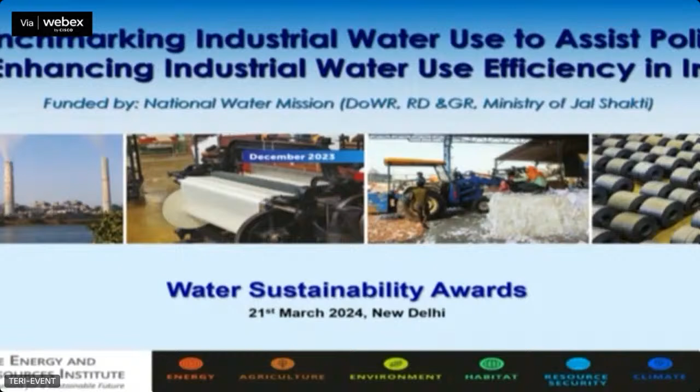Well, as I mentioned, we wanted to start with the discussion on water use efficiency. As my colleague has introduced, we have an eminent panelist, a set of speakers who are experienced in their sectors a huge lot. Dr. Sarkar has been in the water sector for 30, 40 years. He's been Secretary, Ministry of Water Resources as well earlier, had been guiding us.

Mr. Manish Gandhi, really like to thank him for agreeing to be here on very short notice. He has a huge amount of experience on industrial and technological perspectives and innovations in the treatment of water, and therefore the possibilities on usage and improving the efficiency and wastewater recycle reuse.

Mr. Kakar has been with NTPC and has vast experience on water use and some of the innovations being taken up in NTPC's thermal power plants, which he might want to share. And of course, Mr. Dilip, who will bring in perspectives from international experiences and the kinds of experiences in water use and efficiency from the UNDP perspective.

If I may, I just thought we'll start with a discussion on use efficiency. Again, as I mentioned, there are different sectors, and one can go on discussing the issues in each of them. But something we have recently completed, we wanted to have a discussion on - benchmarking water use efficiency in the industry sector in India. We had taken up 4 sectors: thermal power plants, pulp and paper, iron and steel, and textile.

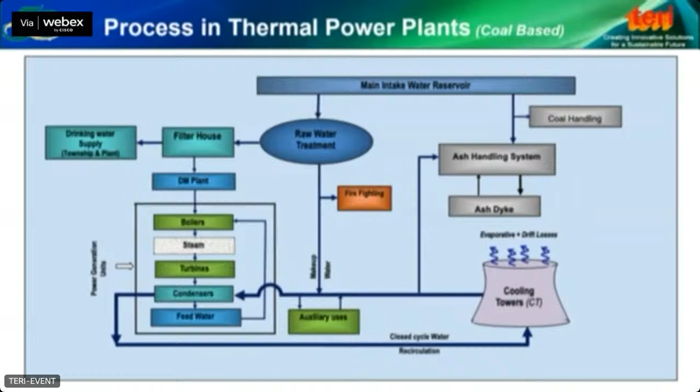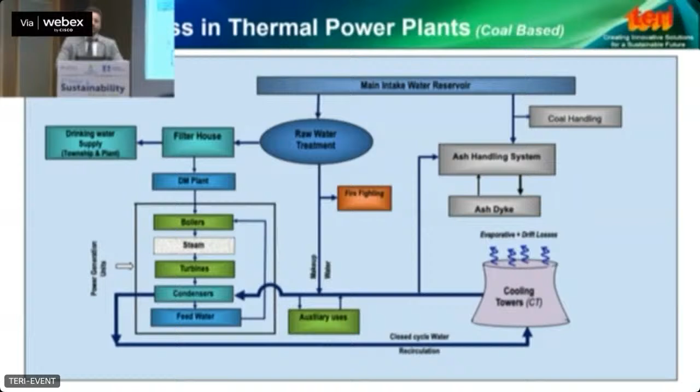I do want to give you a flavor of it. There's a huge lot of discussion details, but I don't want to go into that - rather the key messages, because I want to hold more time for the panel discussion. These 4 sectors, we went through their different capacities and different kinds and types of raw material based production. We audited them on ground, looked into available secondary data across the sectors, and based on these audits, there's a huge range of opportunities that we identified, which is what I want to share with you.

For example, in case of thermal power plants, those of you aware of the process know you use a huge amount of water for cooling of the cooling towers, as well as ash handling, which is used in a huge way in the power generation process. The range of opportunities included, for example, recirculation of water from ash dykes back into the system - reuse and recirculation of ash handling water - as well as increasing the cycle of concentration, which is basically reusing the water used for cooling purposes more times within a closed loop manner.

But there are other opportunities as well. For example, the amount of wastewater generated and discharged out of the system without reuse could very well be reused. I'm just enumerating some of them - some of the NTPCs and power sectors have already taken this up. But this is more to be disseminated to the wider, larger group so that everybody is able to pick it up. So the best practices and kinds of interventions make a huge relevance here.

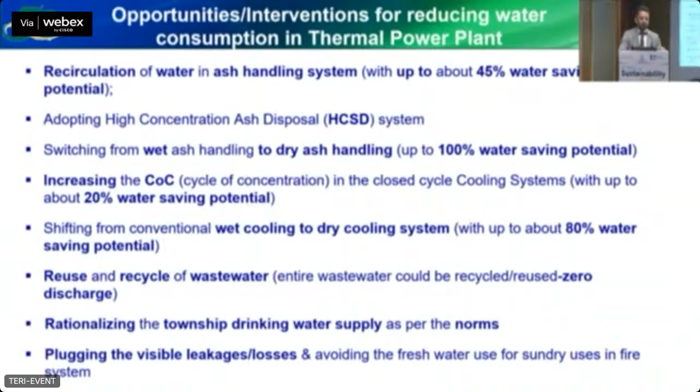There are aspects related to rationalizing water use in the colonies of these industries. Wholly, there's a huge amount of possibility of saving water. If you look into best practices, in the thermal power sector there's dry bottom ash handling, use of hydrobins, concentrated slurry disposal systems, dry cooling - though this is difficult because there has to be a trade-off between power generation and water conservation, but it's still a possibility. And then, of course, other interventions.

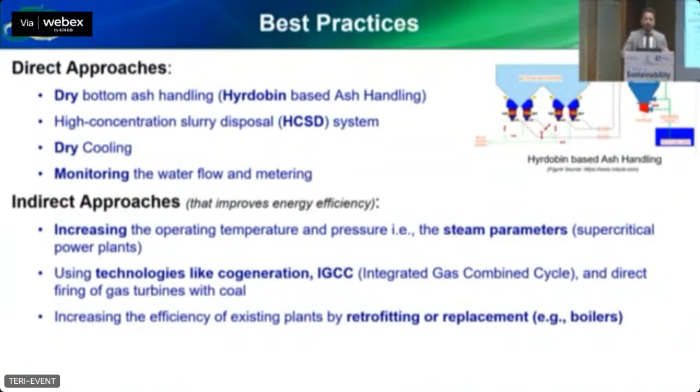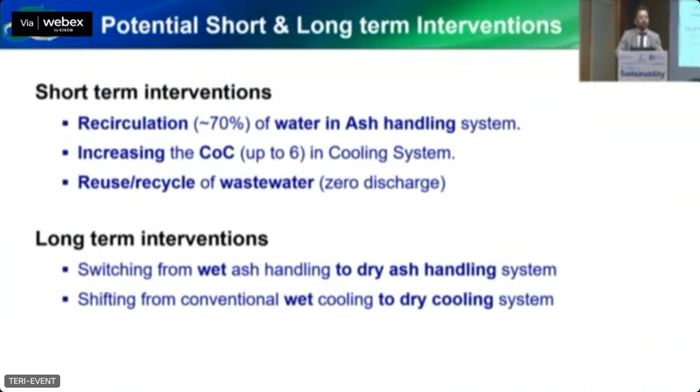There are other indirect approaches, for example increasing the operating temperature and pressure, the steam parameters - basically supercritical power plants have it - and cogeneration processes. All of these are details, but what I wanted to highlight is that in the short term and long term, we identified some very low-hanging fruits - recirculation of ash water and increasing the cycle of concentration, which is more about recycling the cooling system water and reuse of wastewater. This alone can save a huge lot of water because almost 70 to 80% of water in the thermal power generation process is between the cooling system and the ash handling system. Then, of course, the long term involves dry ash handling and dry cooling. These are the kind of benchmarks based on identified interventions and potential opportunities that can be implemented on ground, identified based on different capacities and different kinds of options.

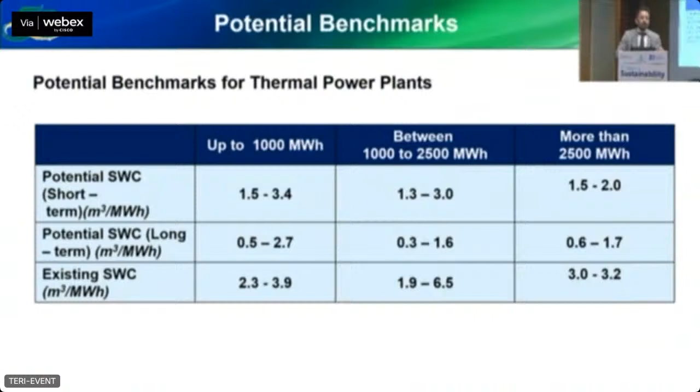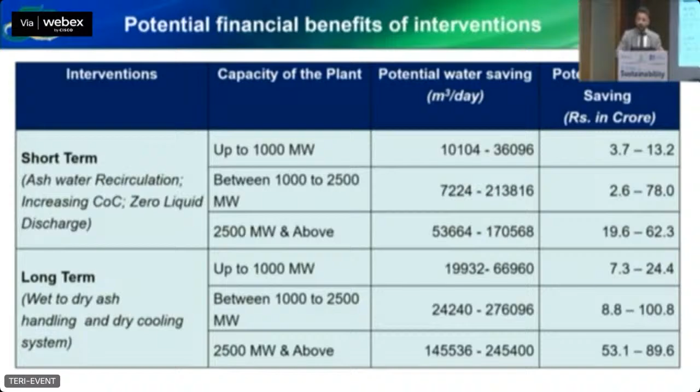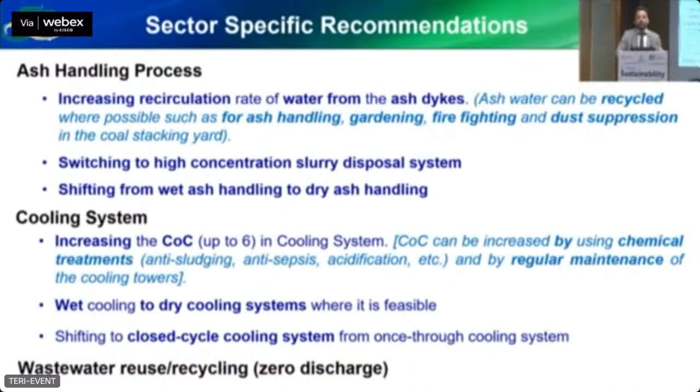I also want to highlight that many of these interventions are a financially attractive proposition as well. Besides saving a huge amount of water, there's also a fairly attractive financial saving. So it makes a lot of sense to take up these specific interventions, which are possibly the low-hanging fruits that can be adopted in this sector.

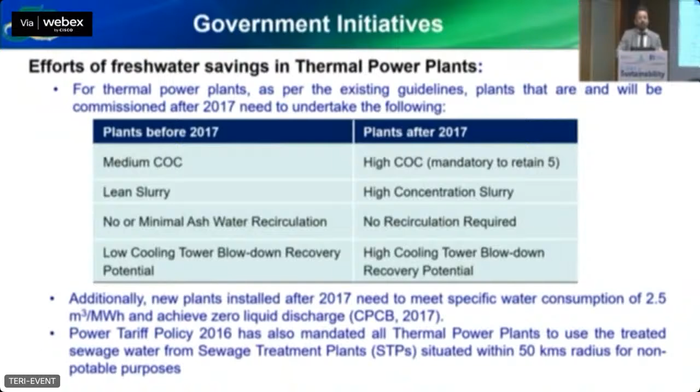There are initiatives by the government. For example, under the power tariff policy, power plants have been mandated to use treated sewage from within a 50-kilometer radius, and many other interventions have been suggested. I think that has helped guide industries toward the benchmark process.

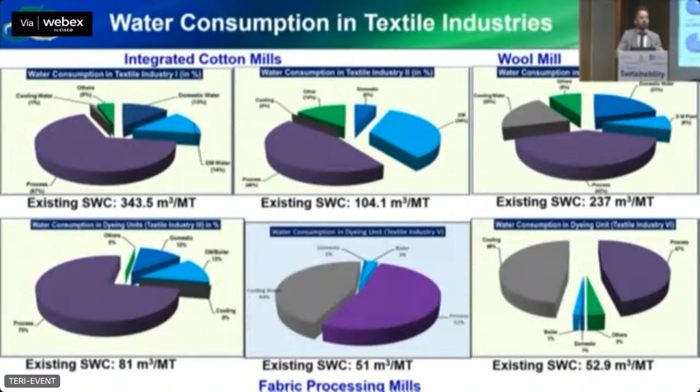Likewise in textile, I'm not going to go into details of the process, but we looked into water use in textile processes. In the entire process of dyeing, right from yarn to fabric to the dyeing processes, there's a huge amount of water consumption.

The summary of the range of interventions you see here is how we can recirculate and reuse water within the processes as they're taking place—for example, in dyeing, in washing processes. Counter current is one example.

Not going into technical details, but the point is there's a huge opportunity for reusing water within the processes while it's being used, as well as after the process—treating and recirculating it within the system for reuse in various processes.

There are examples within textile, for example a highly efficient CIM machine system which optimizes water use. It's being adopted by some industries but can be widely adopted in the sector, and therefore that critical mass impact can be achieved here as well.

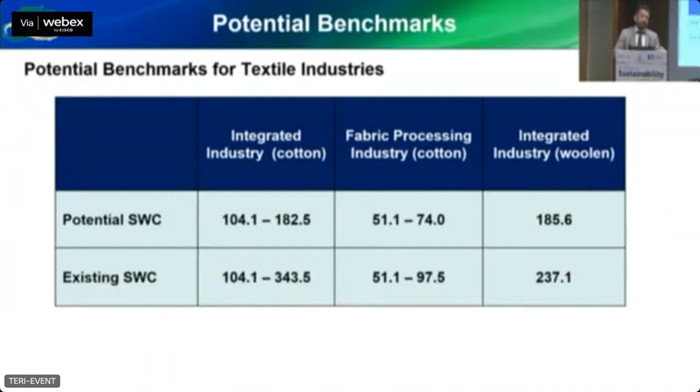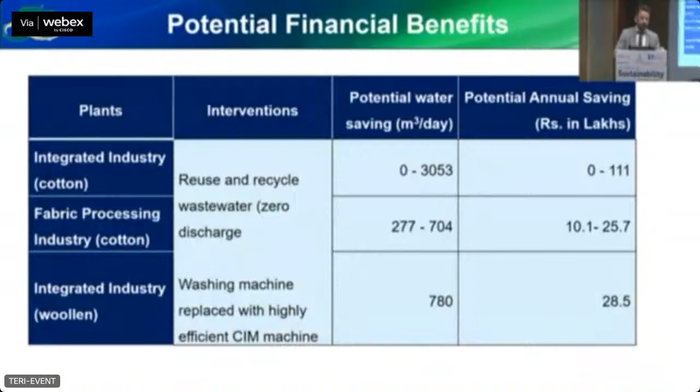Details of the kind of intervention—these are the benchmarks we derived from our study, which can be achieved. By the way, this sector and the pulp and paper sector have moved a long way. Just to give an example, this is the amount of financial saving as well as the water saving.

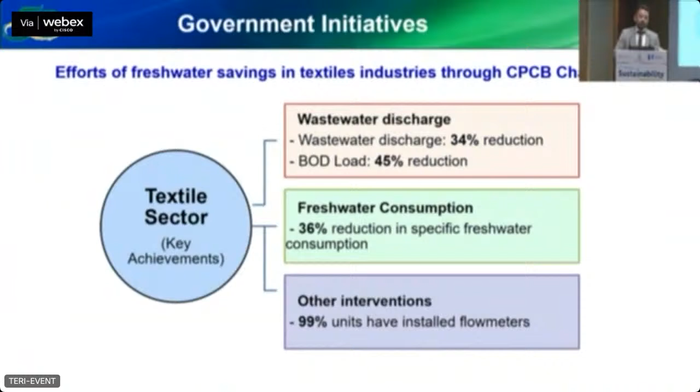Sector-specific recommendations—not going into too much detail—but government initiatives have been significant. CPCB has taken a good lot of initiative in interacting with both the textile and pulp and paper industries, sharing and guiding implementation of best practices in these sectors, which has had a fair amount of impact.

Pulp and paper: there was a time when the pulping process used to take a huge amount of water, largely 80% of total consumption during that period. But over some decades now, the pulping process has improved a great deal, and now water consumption is much less, almost 20-30%, because more reused material is used where pulping is not required.

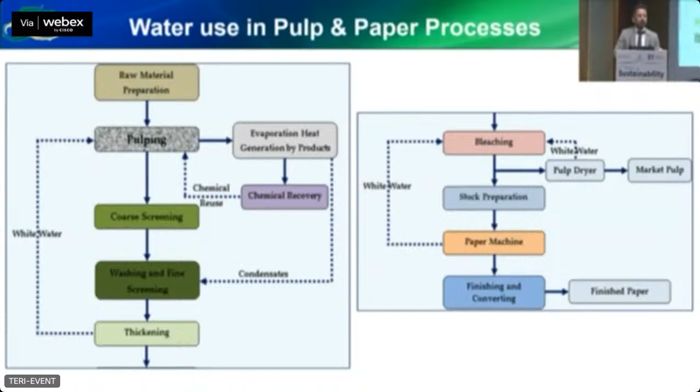As well, there's the removal of color and lignin. So it's the same process, but as you can see, different kinds of process consumption, water consumption, and opportunities.

In this sector, for example in the pulping process: dry debarking, improving pulp washing technology, de-inking process, flotation de-inking process, and introduction of new technologies like dry pulp for cure-form paper, which is almost near waterless, and similar technologies.

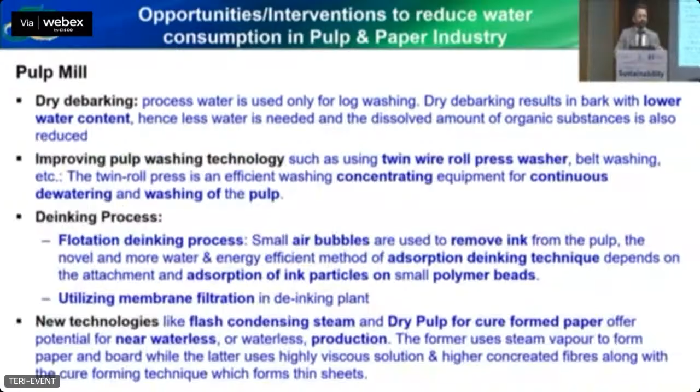Likewise in paper making, there's a saveall clarification system—essentially you collect the water after the process and reuse it within the system. There's also a disc filtration system where you use nozzles to filter the water and get 2-3 kinds of water of different purities.

Then you use the water according to its purity. The purest form is reused into the system directly. The less pure water is further treated and then again reused into the system.

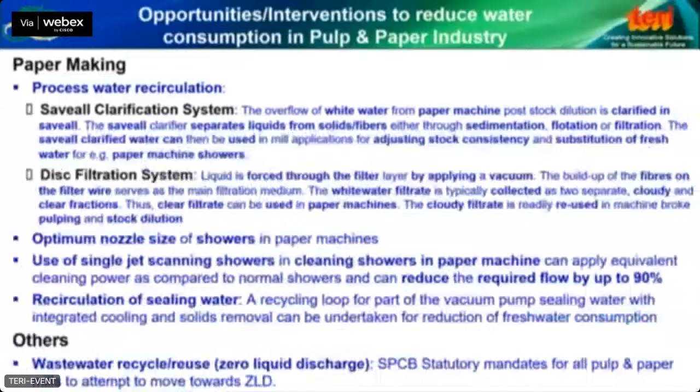All of these are interventions which we found very useful, with huge water saving potential. Applying these brings a huge amount of water saving and therefore the potential for reduction in specific water consumption. Again, you can see huge water saving as well as financial saving.

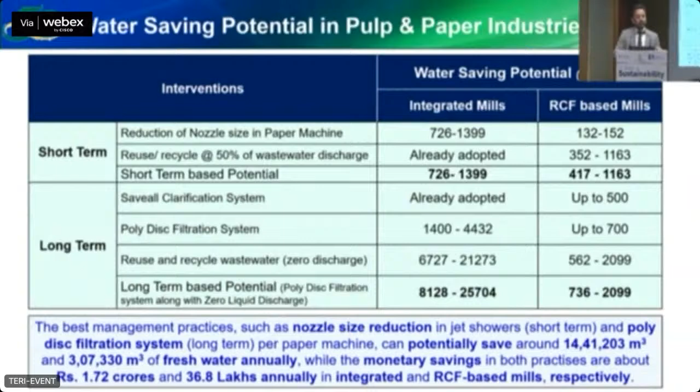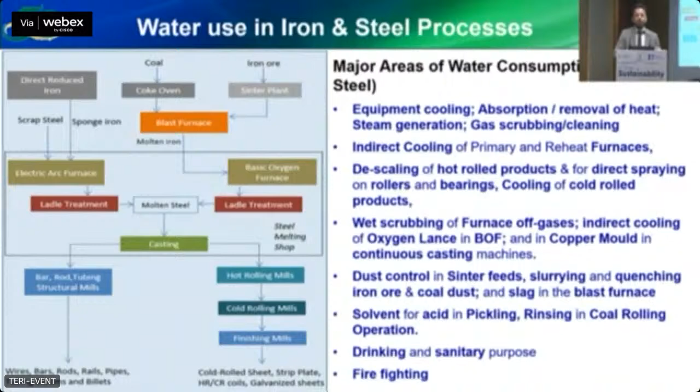Iron and steel, likewise, uses processes like electric arc and blast furnace processes. A huge amount of water is used in this particular industry.

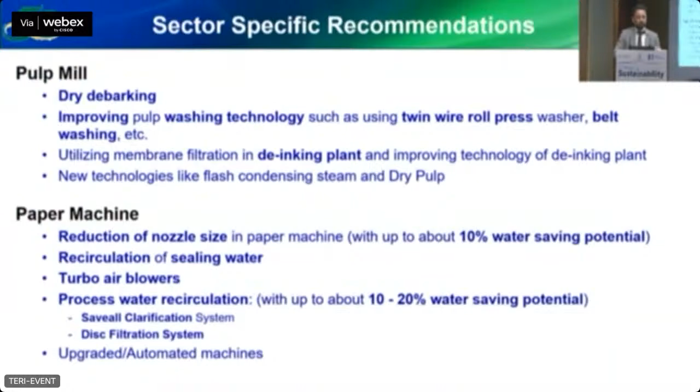Vizag is doing that, and many other industries are also doing that already. So there are some best examples which exist in the sector already. These are some of those ranges of interventions. A huge amount of efficient water use can be achieved, and therefore we identified benchmarks to be fairly lower than what exists now.

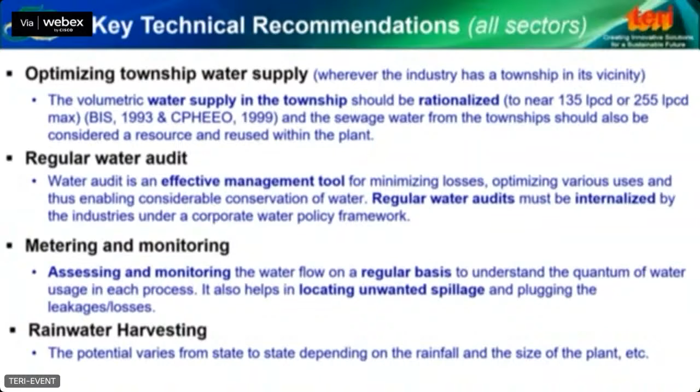All in all, we looked into the kinds of technical interventions within each sector that can be adopted. In general, this includes optimizing township water supply, regular water audits, metering, monitoring, rainwater harvesting, as well as updating technologies, automation, and recycling and reusing treated wastewater against benchmarks. All of these are required not only from the industrial perspective but also from the policy perspective. What we have also recommended in our policy brief is about incentive mechanisms, and these benchmarks can be adopted and further taken to other industrial sectors as well.

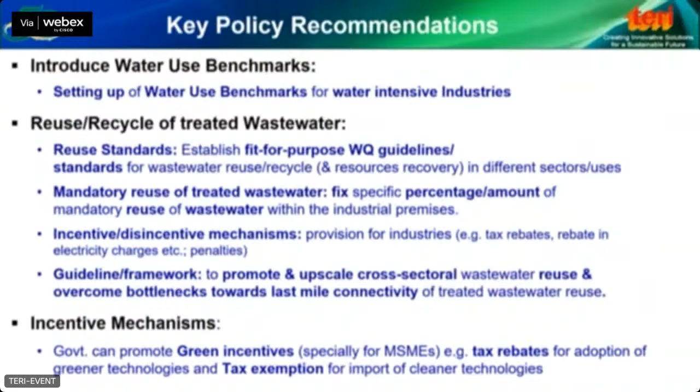The perspective of recycling and reuse of water, and in that sense also the rational pricing of water - not only water but also wastewater, because that too is a resource - is something very much required from the policy impetus perspective, besides the strengthening of institutional and monitoring capacity.

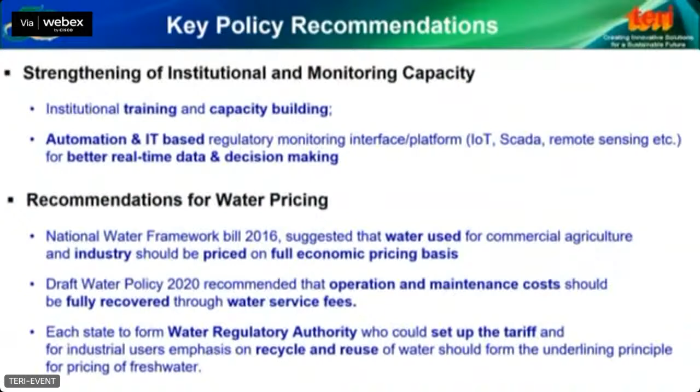I'll stop here. These were some of the key highlights of the detailed study that happened for almost 4 to 5 years, practically, if I exclude the COVID time. We are very happy to have had the support of the industries in this process, as well as the Ministry of Water Resources, National Water Mission in particular. We would like to thank them, as they were key to initiating this particular study.

Now, I wanted to give a flavor of the kinds of opportunities if one would want to go into detail in various sectors. This is something I would want to initiate through a discussion with our esteemed panel - this discussion is not necessarily only focusing on industry. This is some of the work we have done in the recent past. We'll also be launching, or in a way unveiling, a policy brief in a short while.

May I then open the panel discussion and invite Dr. Sarkar to share his thoughts and experiences. He has a vast amount of experience interacting with industries and stakeholders at both ends, within the government and outside the government. He has also been guiding us, and Dr. Sarkar, we would like to hear from you - besides what you want to speak about, also how you see the policy, for example, can be further developed so that we have that critical mass impact, as I keep saying. How do you think, and what do you think are the critical things needed to promote that? Please come over and share your thoughts on this question, if you may.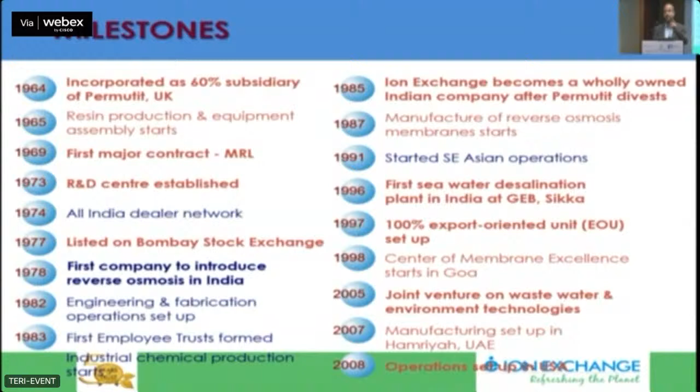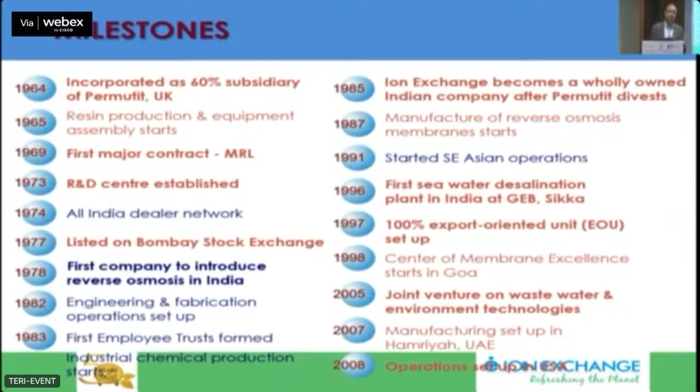85 to 90% of technologies in India are by Ion Exchange. Everything - today, when we are talking about recycling, who made it feasible, right? So I'm going to touch these topics.

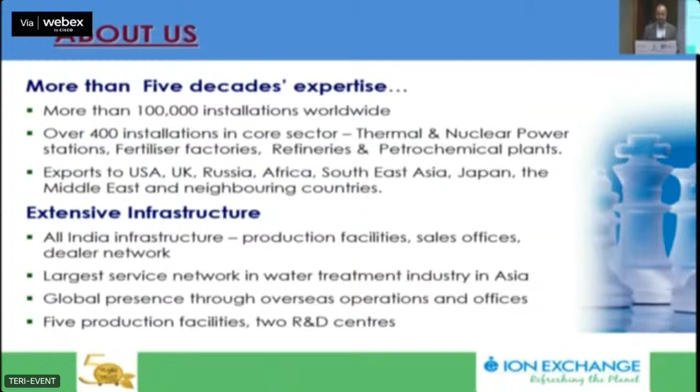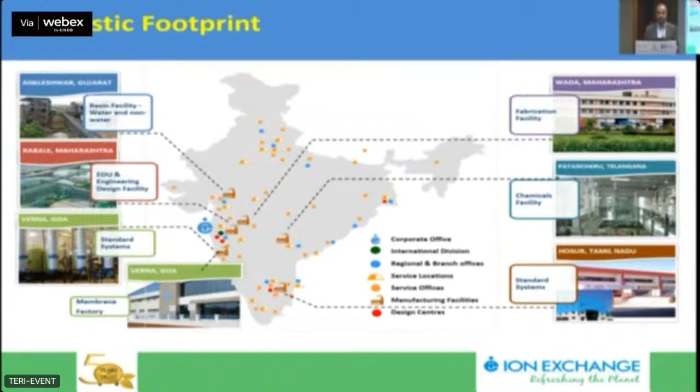We are one of Asia's biggest water and wastewater companies. We have more than 1 lakh installations, almost 400 large power stations, fertilizers, refineries, petrochemicals, steels, plants for mining. Apart from that, medium, light and all, with more than 1 lakh installations. We have 7 manufacturing units across India, more than 2,000 people working in the company with another 3,000 people on our own payroll.

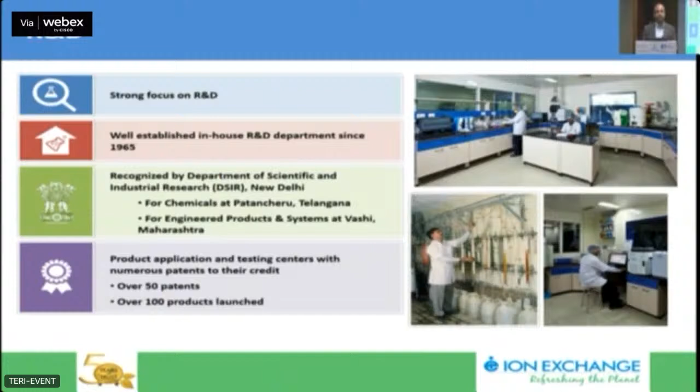We have two big R&D centers in the country - actually big R&D centers - because this company is surviving because of technology, because we keep coming up with new technologies, new solutions. Why? For the sake of industries, for the sake of human mankind, and for the sake of maximum efficiency in what we can deliver to our society and the industries. So the topic is again, how we can conserve water.

Before I show one or two more slides on recycling, use and other things, I want to share one very important piece of information from a recent economic survey by the government - this study mentioned that water crisis is brewing below the ground and up in the sky.

So India is getting affected from both - depleting water below the ground and by rain, which is again a matter of consideration. There are 5 different integrated aspects which are a result of the water shortage. The first and foremost is that the rate of groundwater depletion in India is among the highest in the world.

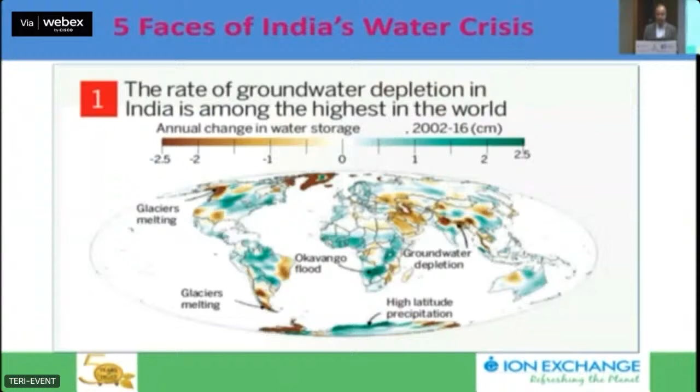Now this is a very, very serious concern. This depletion is something that, in spite of the fact we know this - these are studies by the government - it's still rampant. There are no controls on it, even in cities like Delhi, which is the capital and heart of India.

As groundwater extraction increases, the groundwater table is a cause of concern because it's going down day by day. I don't know whether you know how much is the TDS in the groundwater in the Connaught Place area - one of the most beautiful places in India. It's fluctuating between 8,000 and 10,000, and that too, one has to go 400-500 feet deep to reach it. So this is a serious issue.

Nevertheless, it started with Bangalore - how today employees have been asked to work from home. The statement isn't finished there - go back to your home. Guys from other regions are also asked to go home and come back to your parents' house, operate from there.

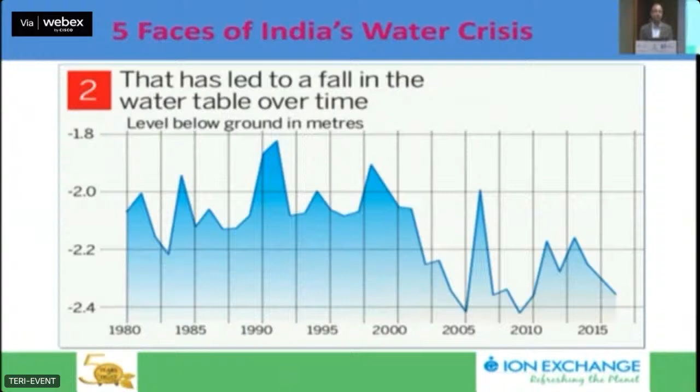This is like a global map - it's an IT hub in the world, and see where we landed. This is a very serious issue. This is the impact of water depletion, not only in the urban sector but also in villages, because everywhere surface water supplies are not available. So withdrawing groundwater from rural and urban areas is causing an equal challenge.

Third is due to rising average temperature. I hope you know we talk about environmental sustainability, and this is a hot topic throughout the world, discussed at all top forums. This is also a cause of concern - there's a temperature rise and a decline in rainfall, and there's no clear-cut time period for monsoon anymore.

Earlier, if you talk about the north, monsoon used to start from 15 July and go up to 31st of August - about 1.5 months. That duration is reducing day by day. Rains used to be on a daily basis, but now it's very scattered - it may rain very heavily for 1 hour, after that it won't rain.

Those irregular, completely scattered patterns have also led to less water going into the ground, resulting again in depletion that is not being covered up.

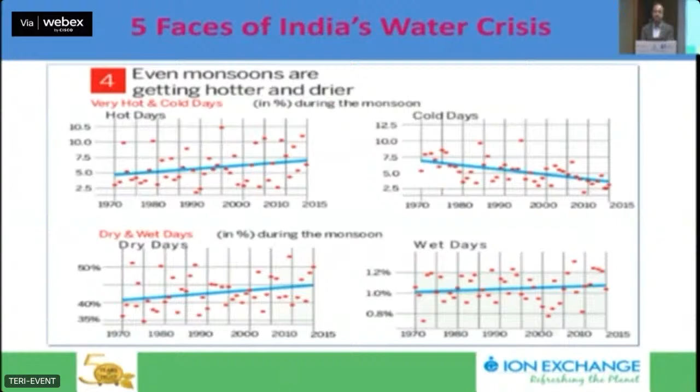So even monsoons are getting hotter and drier. This is a very serious issue. There are a lot of graphs shown, cold days, wet days, hot days and all, but I don't have time to go through each and every slide. These are facts that have come out from government studies which I wanted to highlight. The north and central part of India is very much affected. I'm also handling the East region, and by God's grace, they have enough water. But central, north, and south together, almost three-fourths of India is really going through a water crisis.

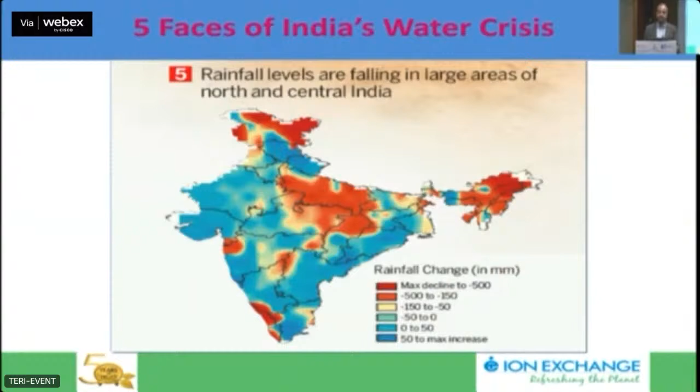What we need to do, look, I come from the industrial perspective. We work for all industries, there are more than 21 kinds of industrial segments. For each and every industry, we now focus on the first water treatment plant we install, how efficient those plants are, and make sure recovery is maximum. Suppose I put in an RO plant, reverse osmosis plant. We make sure whether it's a small or big industry, the RO recovery should be as high as 90%, and wastage should be as low as possible. The water that gets wasted should also go to the ETP plant so we can recycle it. So we always focus on mass balancing.

First and most important thing is the water audit. As Dr. Anshuman has also highlighted, water audit is very key, because if you don't know your total water consumption, how are you going to conserve it?

When we talk of water audit, when we talk of recycling, why do we talk about it? The objective is only water conservation. But I personally feel it's not only water conservation. When we generate effluent and we recycle it, that's a big and major advantage for water conservation. But the second major benefit, which I feel is more important than the first, is that we avoid adulteration of our good water resources which are kept for our families.

We are sitting here, but our family is drinking water, we are drinking water daily. Now all those water resources supplying drinking water at our offices, our residences, all places across India, should be conserved, there should not be any adulteration. But there is adulteration, because there are industries not focusing on these kinds of treatment programs, and because of that everybody is suffering. The number of hospitals is increasing day by day, and all hospitals are full. So this is an indirect impact on the health and lifespan of people. This is indeed a very big crisis.

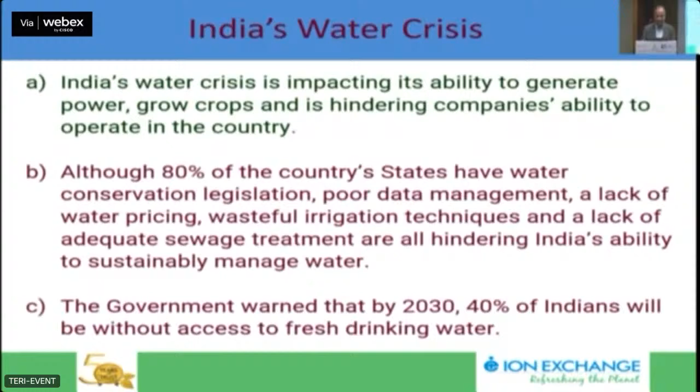So the fresh water which you're taking, you are authorized to discharge only if your discharged water quality is better than the fresh water. So strict rules and regulations exist over there, and that's how things are very sustainable. But these kind of fundamentals don't exist in India. Anyway, this is a very important thing.

So the benefits of recycling are tremendous. This is an important topic for today and tomorrow, which is World Water Day - Water for Peace. Because if it cannot be peace, then definitely it's a matter of conflict between communities, states, and countries. It's going to take a serious turn, which we've been watching for many decades.

So recycling - when we first introduced recycling way back in 1993, IFFCO Phulpur, near Allahabad, became the first plant in India to go for water recycling. That was in 1993, 40 years back.

So it hasn't just started now - it started 40 years back. But sometimes most companies take a lot of time to invest in this segment because they feel it's a waste of money, since water in North India is essentially free. But in South or West India, fresh water is very costly to industries - you'll be surprised. The cost of water in South and West - first of all, it's not even available. Whatever is available costs between 70 to 80, 85 rupees per meter cube.

So there, the justification for recycling becomes very easy. But North India is stubborn. If you increase the tariff by even a few percent, industry starts crying. The same industries in West and South have no issue, but here industries have a lot of issues, because the cost of pumping is hardly 1.5 or 2 rupees - the water is so dirt cheap and available. So this is a serious issue.

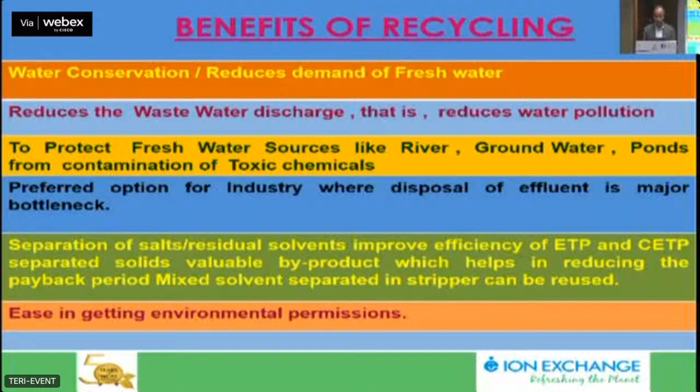So we need to reduce wastewater discharge, remove pressure from fresh water sources like rivers, and protect all these precious sources - also getting environmental clearances must happen. All sources of water like surface water or groundwater should be banned now for industries - no water available for you. So either use sewage water, which is now available everywhere since a lot of STP plants have come up, or use rainwater, or if your industry is in a coastal area, use sea water, or any effluent coming from your plant. This is very important.

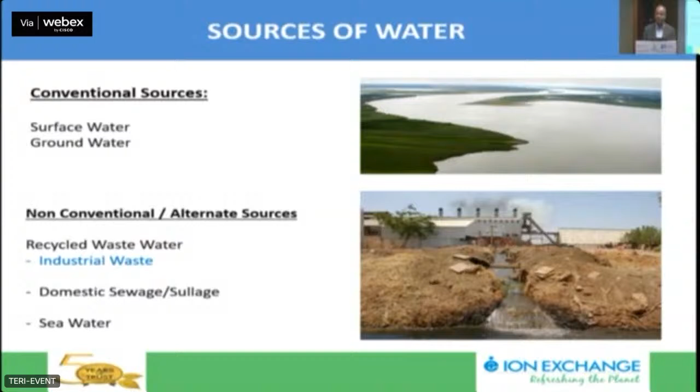In fact, all greenfield projects don't consider these kinds of things anymore - these are obsolete, absolute. So the modern integrated system requires everything to be recycled so that 90 to 92% of the water comes back and gets reused for high-end applications - except for drinking.

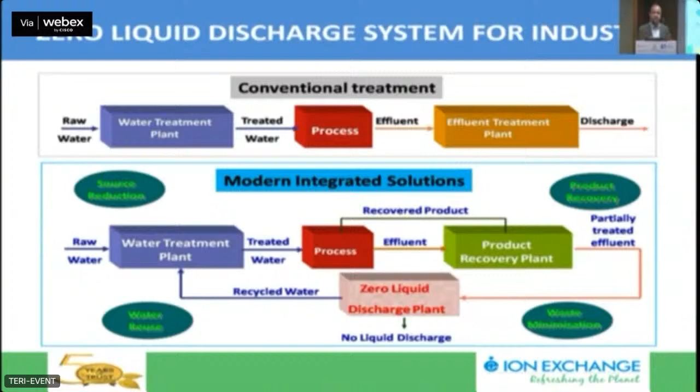Yes, except in two industries - pharma, and food and beverages - where ETP recycled water, even though its quality is as good as fresh water, shouldn't be allowed in direct contact with the product. In the rest of the industries, it can come into direct contact with the product also. So that's about the need of the hour.

In the last 2 minutes, I'll share how we made things feasible - and this isn't theoretical. I visited the Central Pollution Control Board office a few days back and was talking to them. I was stunned when I got a response: 'Sir, is it really possible to recycle the water?' I said, you people are asking this question to me? Why don't you organize a training program with us - we can show you, demonstrate to you.

He said, no, wherever we go, all the industrialists say it's not possible, it's very expensive, and all these kinds of things. I said, I can share all the economics with you, but everything is possible. And recycling, as I explained to him, started in 1993. So all the rest is excuses - of course, it hits the bottleneck of each and every company.

We need to be very wise to design the treatment schemes. Engineering should be very strong so that it is not compromised when plants are installed, and it should be a sustainable model. This is something very complex.

It's a very complex effluent because the chemicals are very toxic - all benzene compounds, with phenols and these kinds of structures in it. Very difficult to break down the organics.

When we talk of recycling, it's feasible only with membrane technology. And let me tell you very clearly, in membrane technology, BOD, COD, oil, TSS - everything should be nil if you want RO to work. So your pre-treatment should be so robust and strong that you can do RO, because RO removes only TDS - dissolved impurities like cationic, anionic, sodium, calcium, magnesium, chlorides, sulfates, these kinds of things.

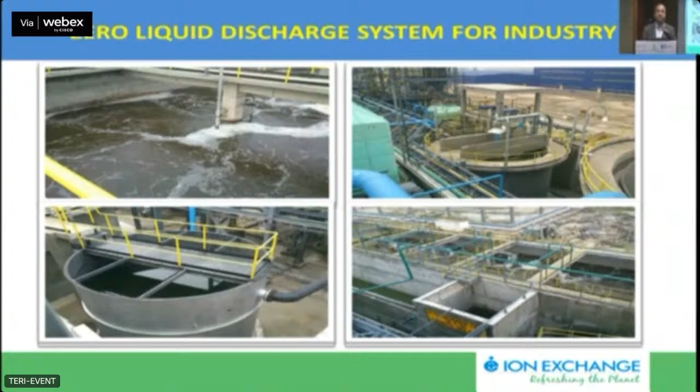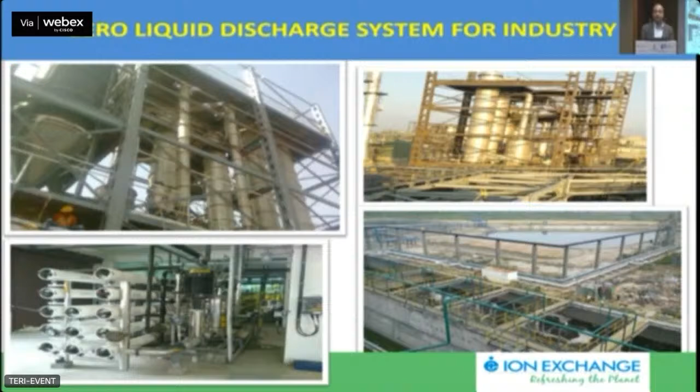These are the photographs - a very compact plant because it's located within agricultural land. This plant has been in operation for almost 8 years now. This is the final multiple effect evaporator, where not even a drop of water goes out, and the plant recovers more than 90 to 93% of the water and recycles it.

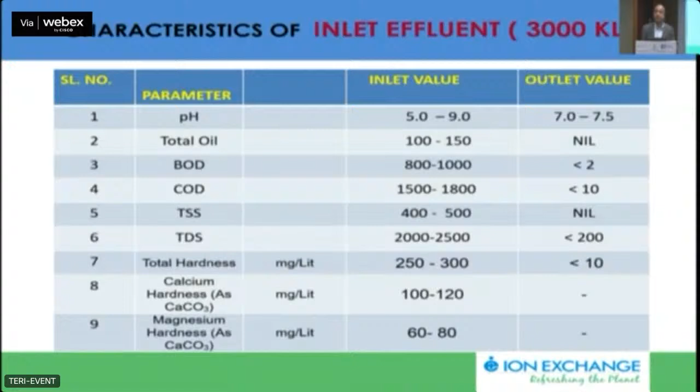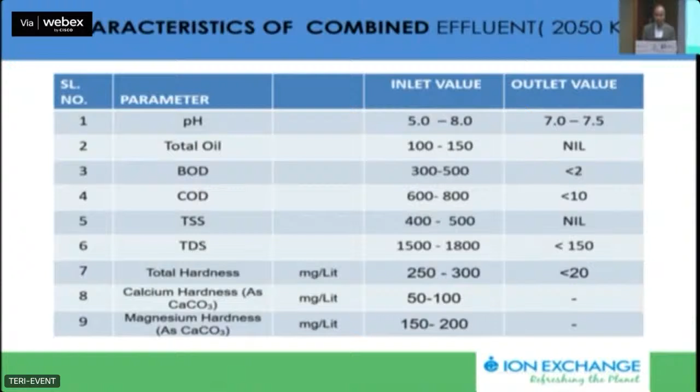So these are the inflows. This is a 3 MLD plant - 3,000 metric cube per day, quite big. We got another order for something about 900 metric cube per hour from a new petrochemical expansion coming up, with zero liquid discharge - not even a drop of water should come out. This is a food park of Patanjali, 5,000 metric cube per day with not a drop of water going out. This is Kia Motor - these are some recent examples.

This last one I would like to share is about power plants. As mentioned, power plants consume the maximum amount of water - they are water guzzlers. The Ministry of Power came out with a circular 5 years back that every thermal power station, if there is an STP within a 50 kilometer radius, must use water from there for all cooling tower applications. This power plant is about 1400 megawatts.

With 1000 or 1400 megawatts, the cost of investment is close to 10,000-12,000 crore rupees, maybe right now it could be 15,000 crores. So after making so much investment, Nasik Municipal Corporation said no water. The plant owner said I have only two raw materials - coal and water. It's a thermal power plant, and you're saying no water, so where will the investments go?

After intervention of the Maharashtra government, they were told that Nasik Municipal Corporation has an STP plant about 25 kilometers away - bring the water yourself, treat it, use it, and add it to your membranes. No fresh water would come to the plant because Nasik faced a drought issue in those years. So that's how this company came out with a global tender.

Now the problem is, once you install an STP, and after that BOD or COD is still coming out, what will you do? Are you going to install another STP to bring BOD, COD to less than 5 or less than 10? That's not feasible because there's no food source for it, and it would be very expensive.

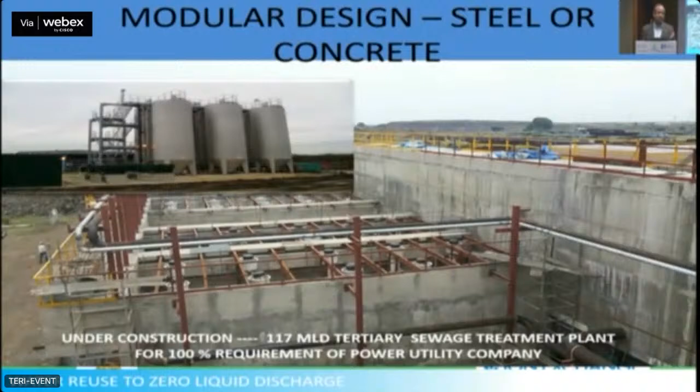We made the water quality so good that it can act as feed to UF and RO plants. So not only is it used as makeup for the cooling systems, they're also using it as feed to the RO plant because there's no fresh water available. There are so many case studies now - I've got not less than 40-50 case studies, but due to time constraints, we can't show them all.

But for all segments of industries, everything is feasible. The only thing which is required is the will. And where there is a will, there is a way always. So this is something I thought, let me show some case studies also.

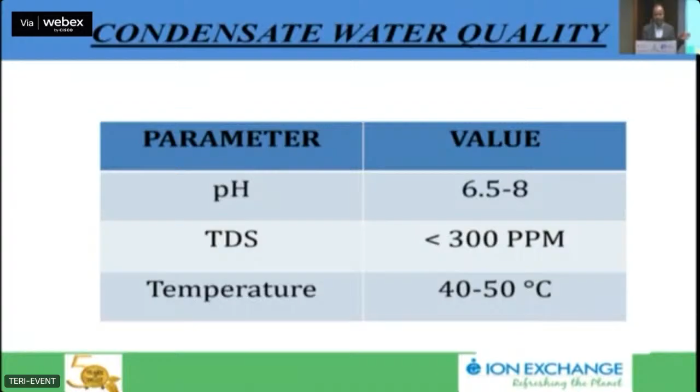So when we talk of ZLD, at the last we talk of zero liquid discharge with multiple effect evaporators. So recycling, even for those who do not want to go for MEE because it's very expensive, can definitely conserve water up to 90 to 93%. So only 7% fresh water is required to run the entire premises, which is quite good. Second thing is there is no adulteration of effluent to the rivers, so that society is preserved and conserved.

Thank you very much.

Thank you, Mr. Gandhi, for those excellent examples and ready technology that you shared with us. I think recycling and reuse is something that has to pick up the pace. And we keep saying that no more should the terminology wastewater be used now. Even the ministry is now using the word used water. And like in many other countries, there are innovative ways of mentioning the wastewater. So I think this is something that's going to play a major role.

My pleasure now to invite Mr. Dilip Singh, National Project Manager, UNDP India, to come on board and share his thoughts about the perspectives on efficiency, and how he sees the larger role of agencies like UNDP in promoting water for all, water for peace, and in general the efficiency perspective. Feel free to share your thoughts.

Yeah, thank you, Anshuman. And good afternoon, ladies and gentlemen. So it always feels good to be back in a TERI event. I started my professional journey with TERI actually, way back in 1992. So it's like almost 34 years, 32 years now.

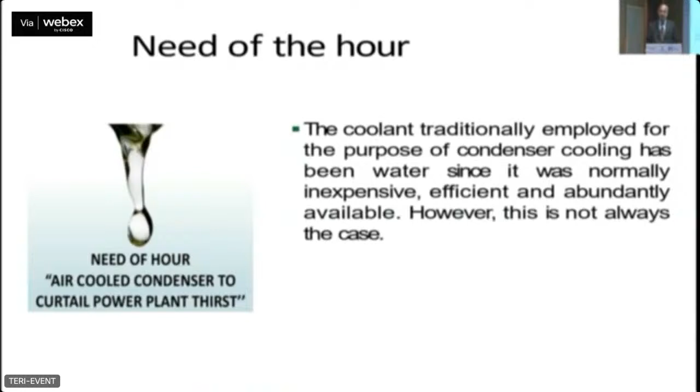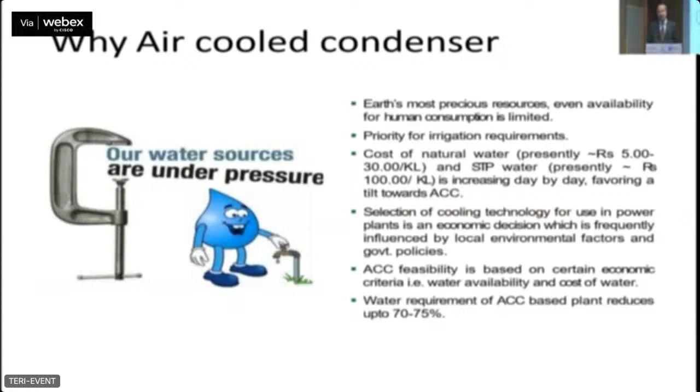So why do we talk about air-cooled condensers? Earth's most precious resource, even available for human consumption, is limited, with priority for irrigation requirements. Cost of natural water presently varies from 5 rupees to 30 rupees per kiloliter across the country, and STP water, presently 100 rupees per KL, is increasing gradually day by day, favoring a tilt towards ACC - that is, air-cooled condenser. Selection of cooling technology for use in power plants is an economic decision which is frequently influenced by local environmental factors and government policies. ACC feasibility is based on certain economic criteria, that is the water availability and the cost of water. Water requirement of an ACC plant reduces up to 70 to 75% as compared to a conventional condenser.

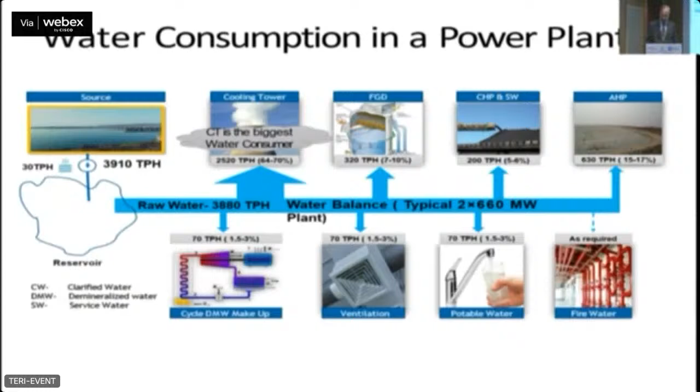NTPC, with an installed capacity of 75,418 megawatt and approximately 25% share in India's generation, is an integrated power major.

Recently, NTPC achieved the milestone of generating 400 billion units in a financial year. This is the highest ever generation by NTPC since its inception.

North Karanpura in Jharkhand marks a milestone as India's first air-cooled condenser installed supercritical plant, demonstrating NTPC's commitment towards water conservation through the 3 Rs: reduce, reuse and recycle. This project has been envisaged with an air-cooled condenser, which has almost 1/3 the water footprint as compared to a conventional water-cooled condenser.

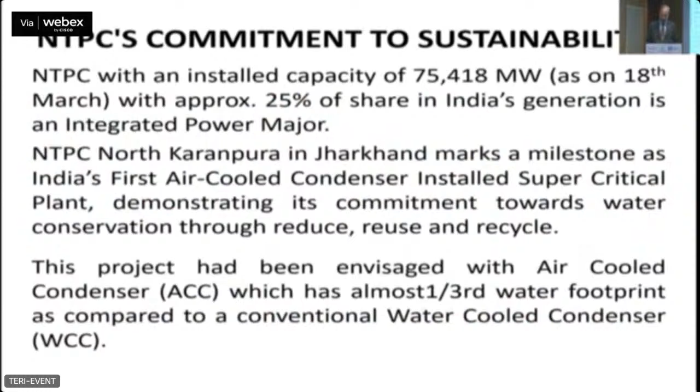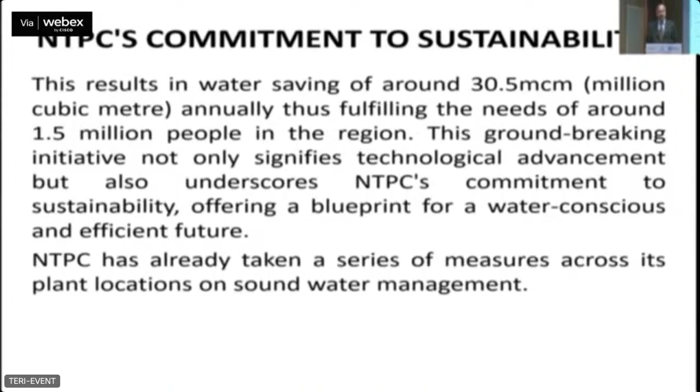This results in water saving of around 30.5 million cubic meters of water annually, fulfilling the needs of around 1.5 million people living in that region. This groundbreaking initiative signifies technological advancement and underscores NTPC's commitment to sustainability, offering a blueprint for a water-conscious and efficient future.

NTPC has already taken a series of measures across its plant locations on sound water management, and will further imbibe the 3 Rs for water conservation while carrying out its core business of power generation. NTPC is a signatory to the prestigious UN Global Compact CEO Water Mandate, and is committed to proactively addressing water sustainability issues through implementation of its water policy, which serves as a directive for establishing water management strategies, systems, processes, practices, and research initiatives.

So we talked about the air-cooled condenser. Since it's a new technology, I'd like to share how it works. An air-cooled condenser is a direct dry cooling system where steam is condensed inside air-cooled fin tubes. The cool ambient air flowing outside the fin tubes removes the heat and defines the functionality of an ACC.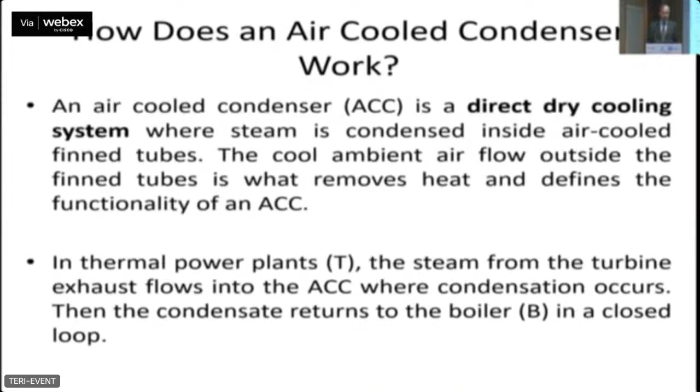In thermal power plants, steam from the turbine exhaust flows into the ACC where condensation occurs. Then the condensate returns to the boiler in a closed loop. Since the steam coming from the turbine is at low pressure, the ACC works at a pressure close to vacuum, and non-condensable gases are removed continuously by an air evacuation plant, mainly a vacuum pump.

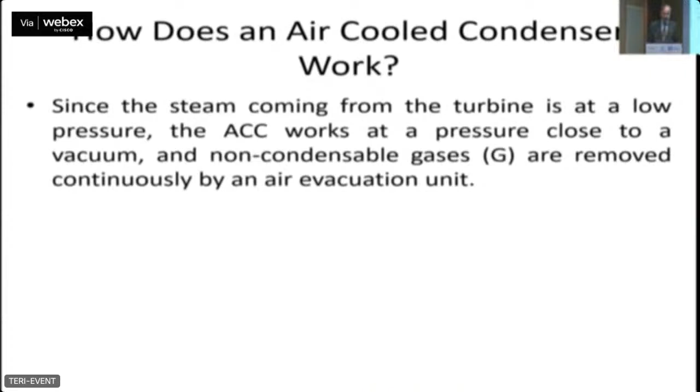Here, the slide again shows what we have already seen: the air-cooled condenser is a direct dry cooling system where steam is condensed inside air-cooled fin tubes. Exhaust steam flows through a large diameter duct to the steam distribution header, feeding several vertical risers. Each riser delivers steam to a steam distribution manifold that runs horizontally along the apex row of fin tubes. Air-cooled exchangers exchange heat, and of course the steam is cooled.

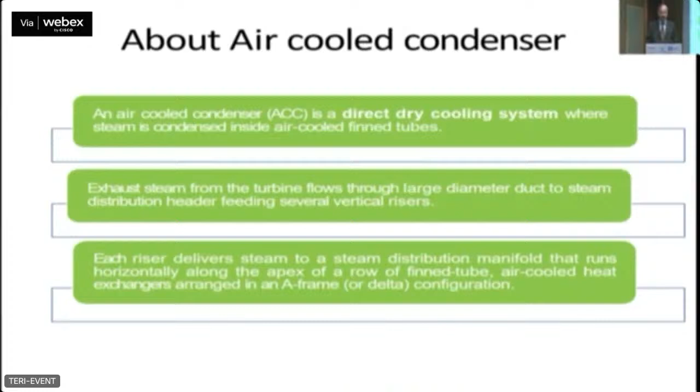Then you have a duct. Through the duct, it goes to the air-cooled condenser plant, wherein you have fans. By use of fans, you condense the steam.

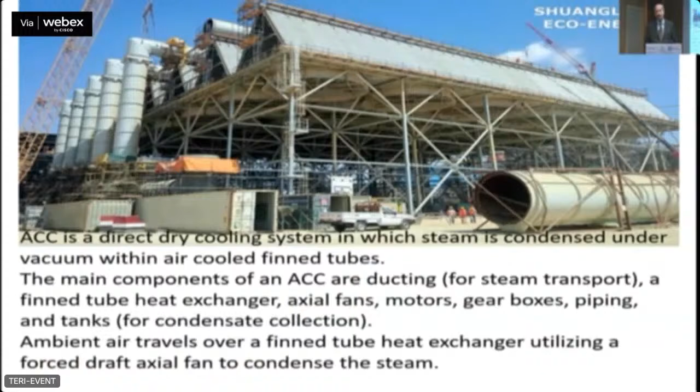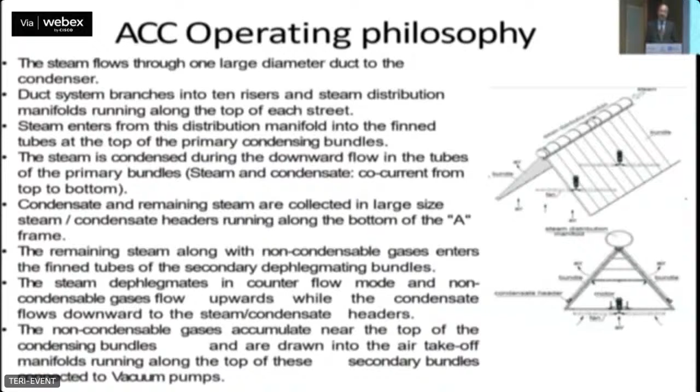Steam is condensed during the downward flow in the tubes of the primary bundles. Condensate and remaining steam are collected in large size headers. Remaining steam with non-condensable gases enters the fin tubes of the secondary bundles. So you have two types of bundles: the primary bundles, where the main condensation takes place, and the secondary bundles. Finally, the non-condensables are taken to the top and removed.

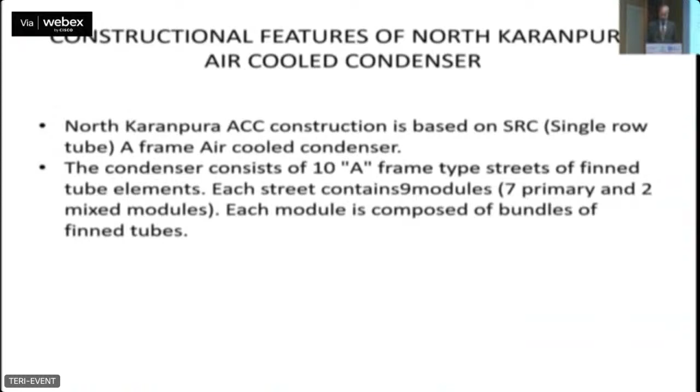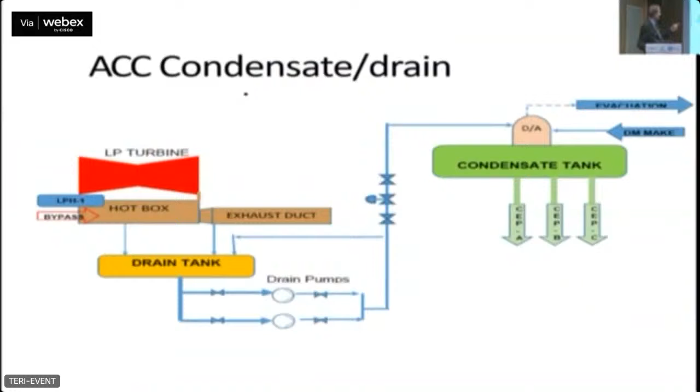Here you can see the difference between a conventional condenser and the ACC. Below the LP turbine, instead of a condenser, we have a hot box. From the hot box, you have an exhaust duct carrying the low pressure steam, which is the exhaust of the LP turbine. This is condensed. After condensation, the condensate comes into the drain tank, and by means of the drain pumps, it is taken to the deaerator, then to the condensate, and it comes back into the normal cycle.

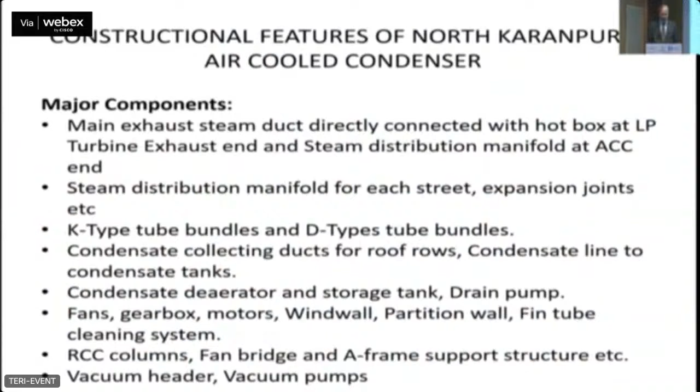These are some of the constructional features of North Karanpura air-cooled condensers.

Now you can see the size. Since it's an air-cooled condenser, the size is 132 meters by 131 meters. We have 25 columns, each column has 10 streets, and each street consists of 9 modules. So while a conventional water-cooled condenser is quite compact and small, the air-cooled condenser is gigantic, almost 132 by 132 meters.

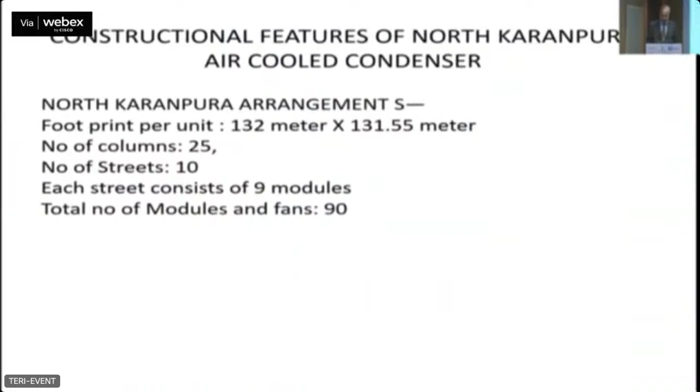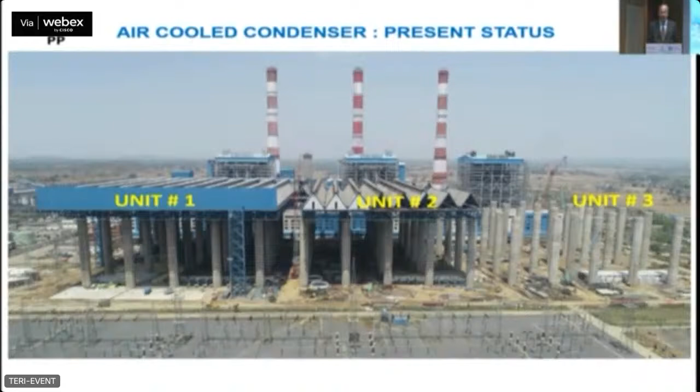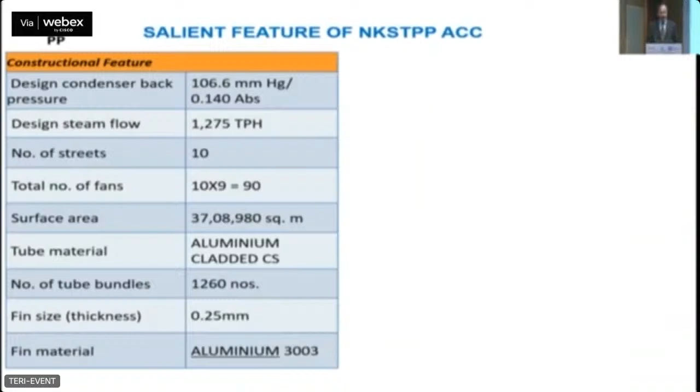Now I have come to the slide showing a comparison between the conventional condenser and the air-cooled condenser. You can see the water consumption in a comparative plant of Khargone, where we have 2 units of 660 megawatt, and North Karanpura with 2 units of air-cooled condenser. In Khargone, the water consumption for the year would be 40 million cubic meters, while for North Karanpura it is only 15.

Since water has a better specific heat, the cooling is better, so you have a lower unit heat rate. Khargone has a heat rate of 2070 kilocalorie per kilowatt hour, whereas for North Karanpura it is slightly higher, at 2237 kilocalorie per kilowatt hour.

Consequent to a higher heat rate, the specific coal consumption is also on the higher side. For Khargone, it is 7.1, while for North Karanpura, it is 7.9.

Since coal consumption is on the higher side, naturally CO2 emission will also be higher. It is 12.8 for Khargone and 13.5 for North Karanpura.

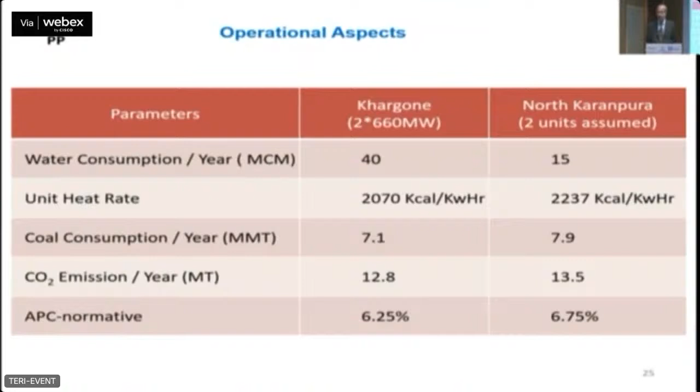But what we have seen is that water consumption is drastically low. That is because water availability was a major factor at North Karanpura, which is why the company decided to go for an air-cooled condenser. Thank you.